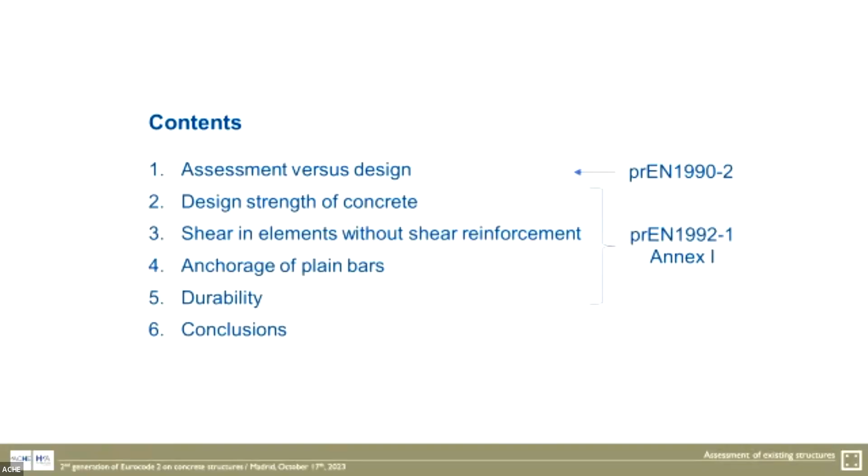One of the objectives of the new generation of Eurocodes has been to include provisions for the assessment of existing structures. In this presentation, we will start commenting very briefly some differences between assessment and design, and then we will comment some topics that could be conditioning factors in the assessment of concrete structures.

Regarding the first part, Eurocode 0 has been divided into two parts. Part one is like the current code we have, focused on design, but the second part gives some provisions for the assessment of existing structures.

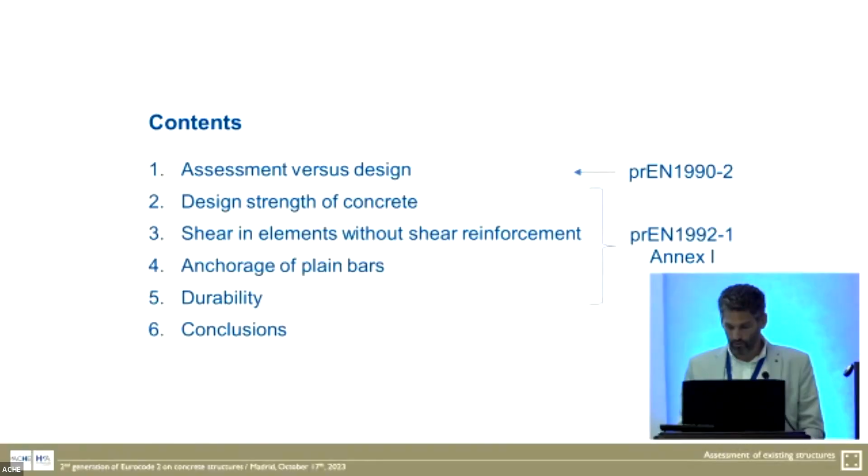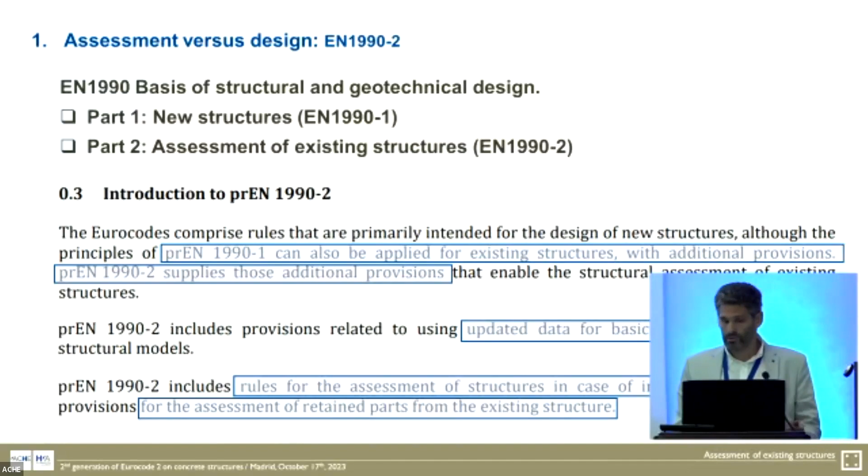Regarding the second part of the presentation, as Mr. Gant has already commented, Eurocode 2 has included an Annex I, with provisions for these topics. Starting with Eurocode 0, as indicated in the introduction of Part 2, Part 1 can also be applied for existing structures, but with additional provisions which are given in Part 2. These provisions are rules for the assessment of structures in case of intervention, and also for using updated data in the basic variables.

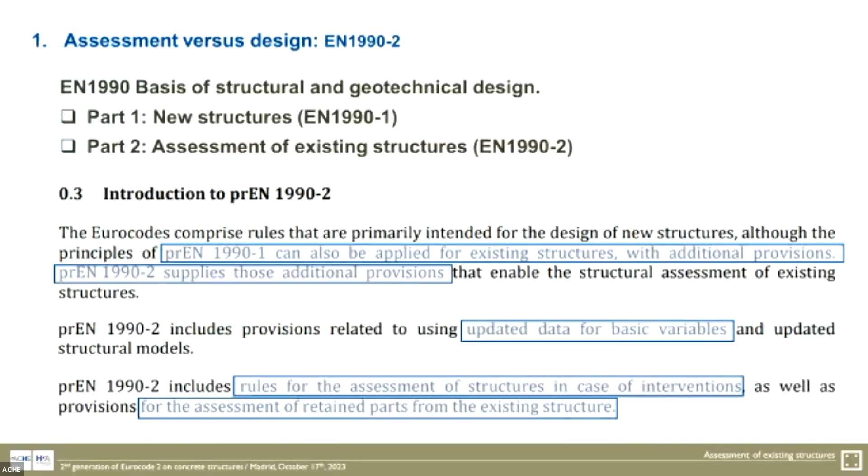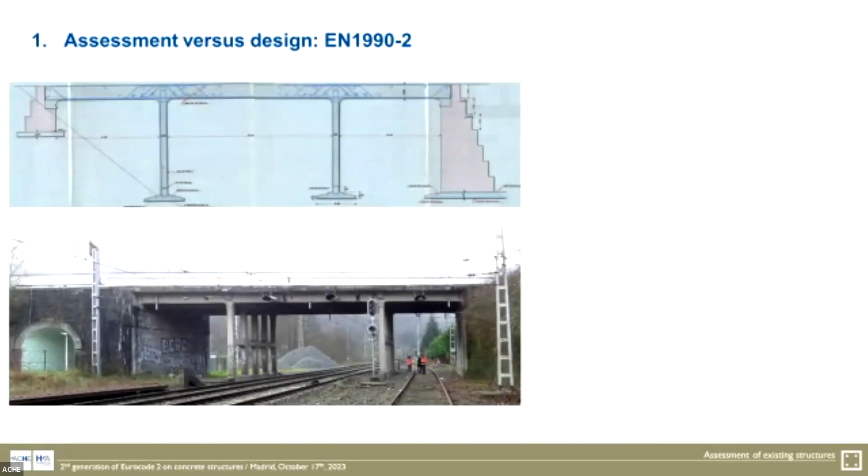In this example, we can check some differences between assessment and design. The slide shows a plan of a bridge, which was built in the 1930s, and a view of the bridge today. Of course, the regulatory criteria in design were different to those we have today, and many specifications about materials or details will not be met today. On the other hand, the bridge allows us to have information directly from the structure, and it reduces the uncertainties, and that will allow us to reduce the reliability index.

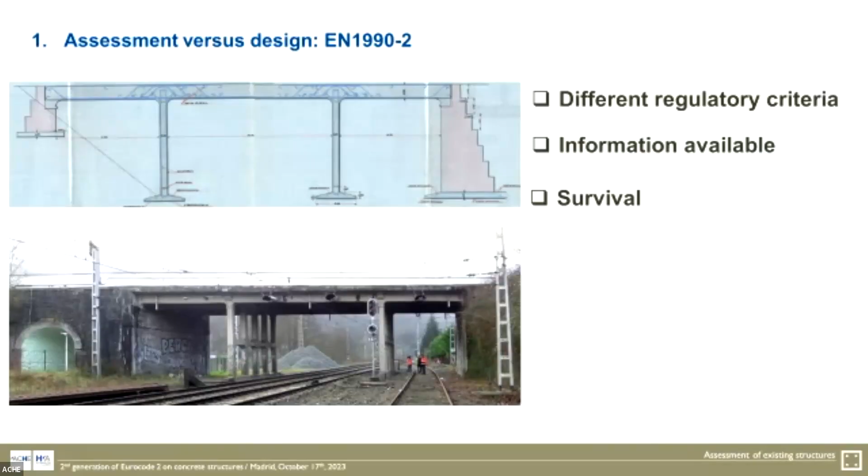In the same way, in cases like this, where the bridge has developed adequate behavior, survival, mainly when permanent loads are dominant, allows us to reduce the reliability to consider in the new service life. In the same way, in existing structures, the cost of measures to increase security is much higher than in design. So that is another reason why we could reduce the reliability index.

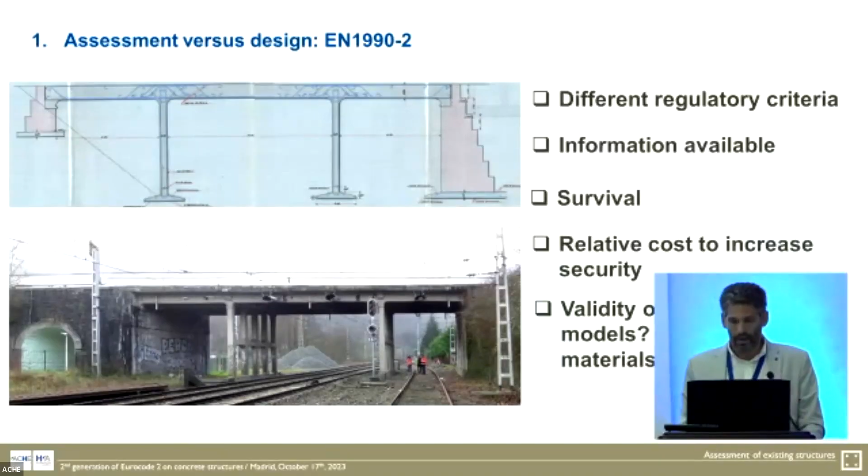In any case, we engineers must be sure of the validity of the physical models we use, as concepts such as utility or robustness were not as important as they are today. Because of all this, Part 2 of Eurocode 0 has included provisions for the investigation of the existing structure, but also some criteria to make the assessment.

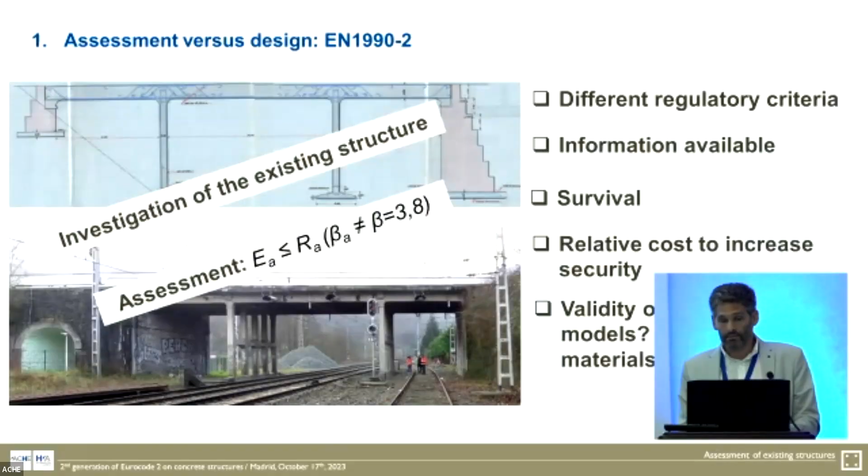And in the case we do it in a semi-probabilistic approach, as we do in design, it is proposed to do it with a different reliability index, different to 3.5, 3.8. This means that usually partial factors are lower than we use in design, but we must be careful, as we will check now.

Going into concrete existing structures, one of the main topics we need is to specify the concrete class. We do it by extracting cores from the structure. When we have the concrete class, we can define the design, or in this case, assessment concrete strength, by dividing the concrete class by a partial factor.

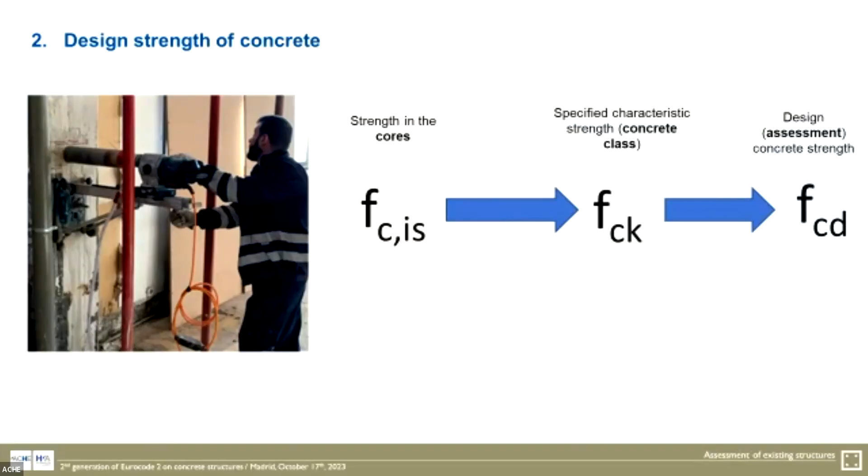For the first step, Annex I has included an important coefficient which takes into account the damage because of core extraction, the uncertainties of testing, and also the differences between concrete inside the core and concrete in the structure, as Jose Maria commented before. For the second step, as Jose Maria already commented, it is possible to update the partial factor, taking into account the new reliability index, but also the scattering and the size of the sample, of course.

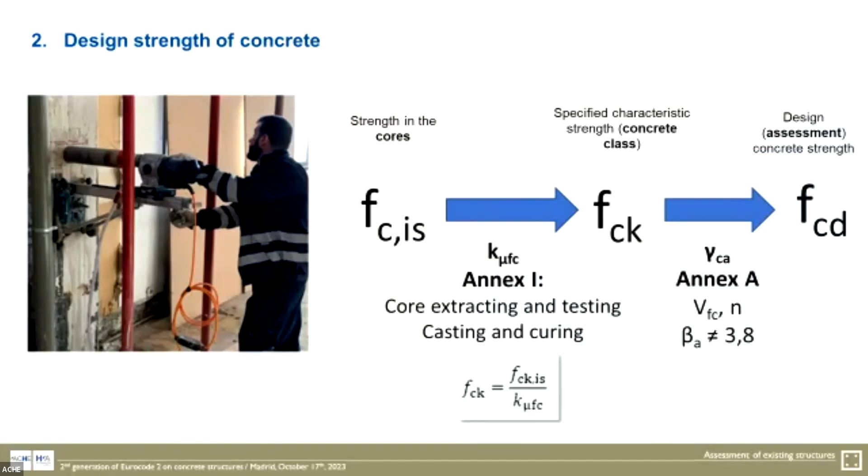This scattering is very important. In this graph is represented the coefficient of variation of concrete in different buildings and structures we have studied. And as you can check, in most cases, it is over 0.20.

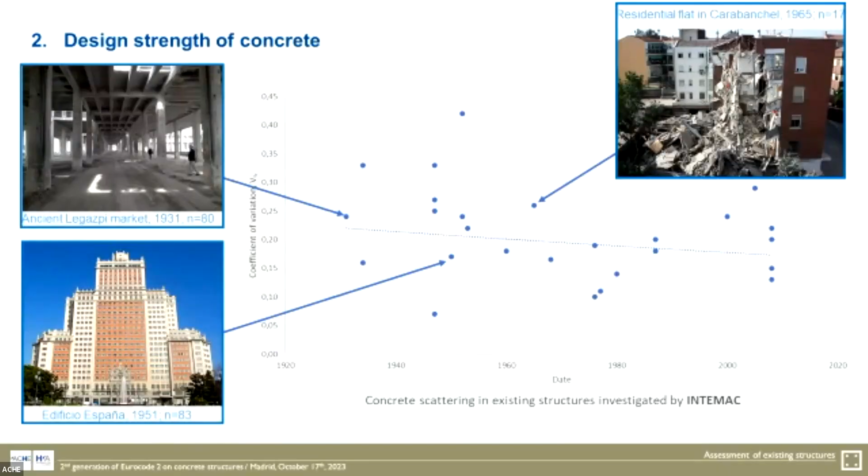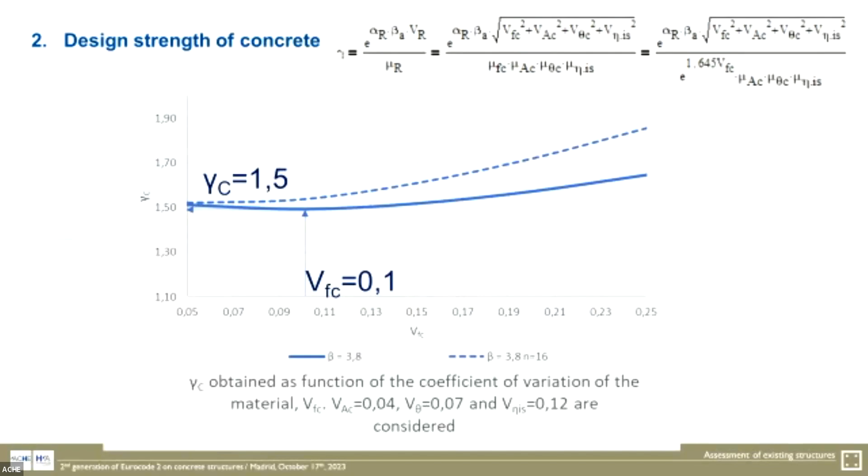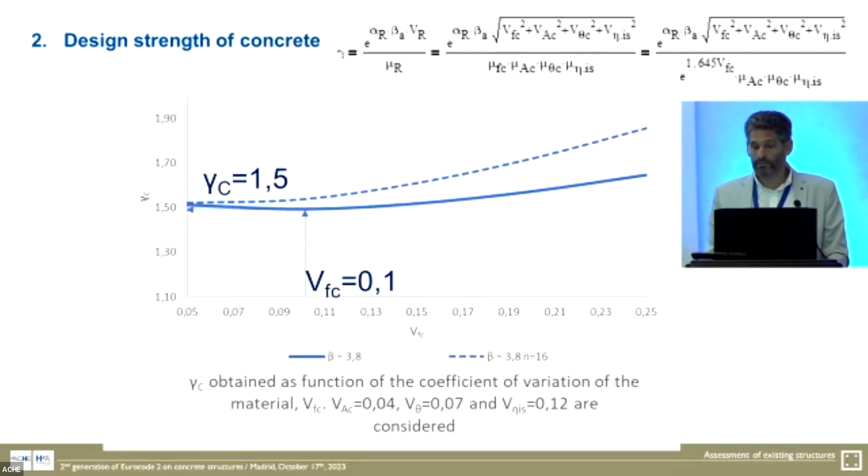Using the formulas that you can see in Annex A, you can easily obtain this graph, and you will check that the partial factor for a reliability index of 3.8 will be higher than the 1.5 we use in design because of that scattering in the sample. Of course, if the size of the sample is smaller, the differences will be higher. On the other hand, we can usually use a lower reliability index, and this means that the differences with design partial factors are lower.

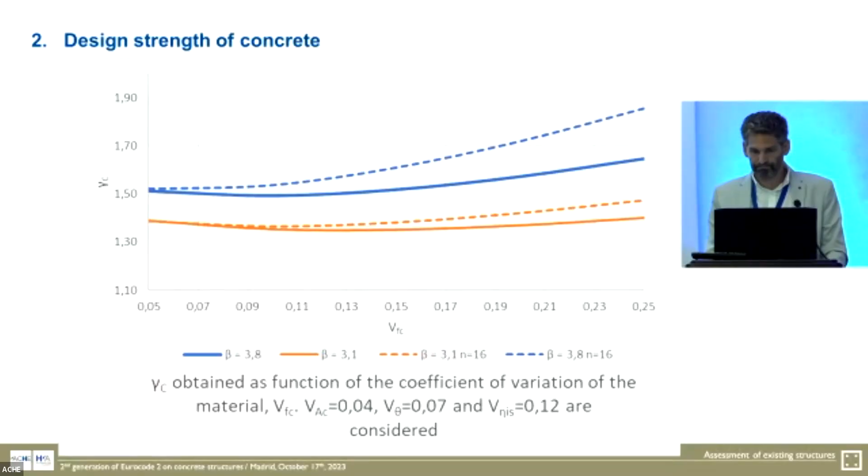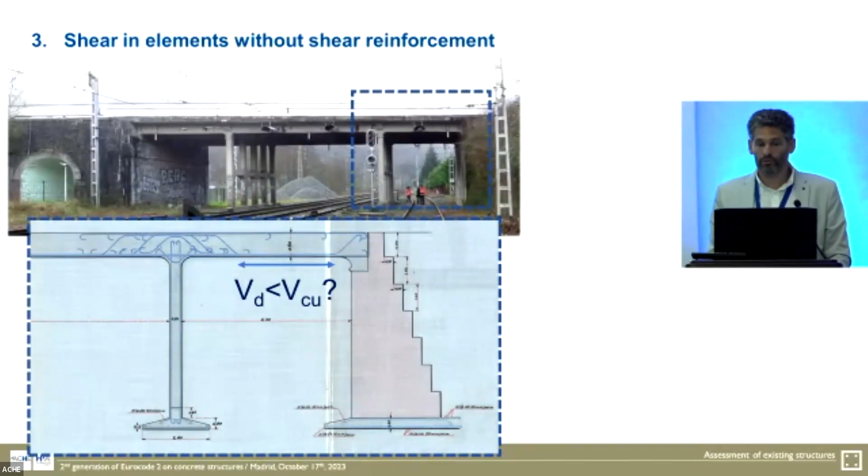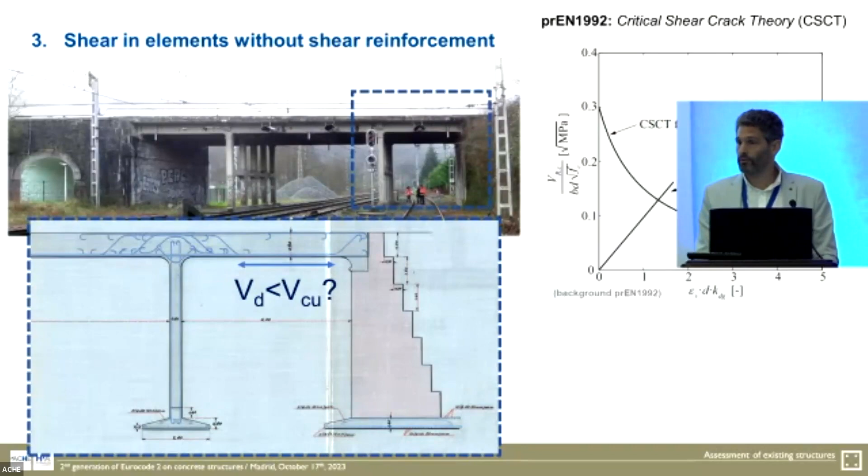Another key issue in the assessment of existing concrete structures is shear in elements without shear reinforcement. As will be explained later, Eurocode 2 has adopted the critical shear crack theory, and in the main text, they have made a small simplification to have a simpler formula. In the annex, the original formula is proposed, but in both cases, the important thing is that you can use the strain in the longitudinal reinforcement at the control section, epsilon v, and that allows you to optimize the shear capacity.

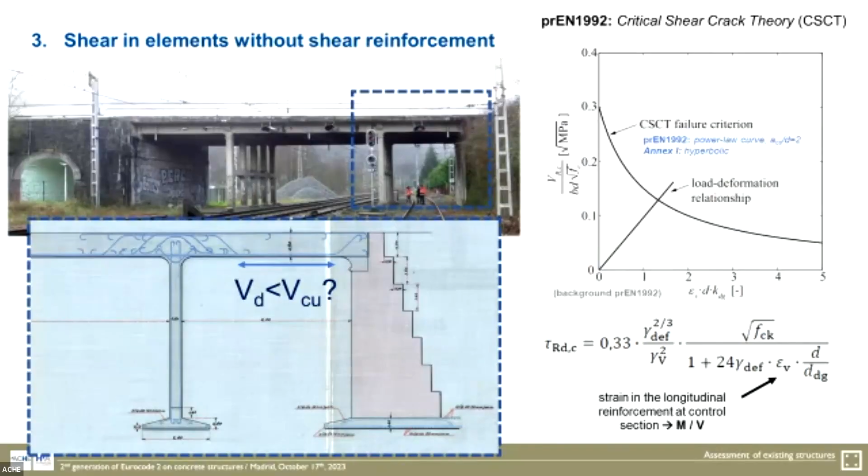It is explained in the paper of the monograph, but very briefly, in these graphs you can check in thin lines that the differences between the two formulas, Annex I and the main text, are not very high, but in both cases the shear capacity is quite a bit bigger than with the current code.

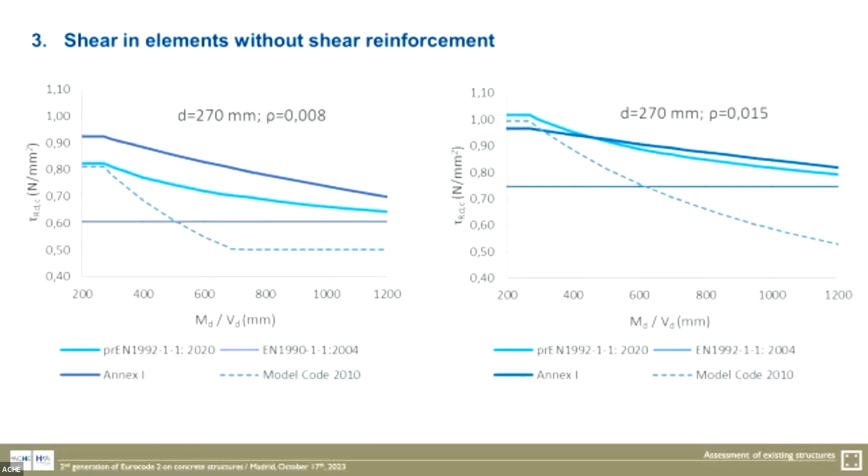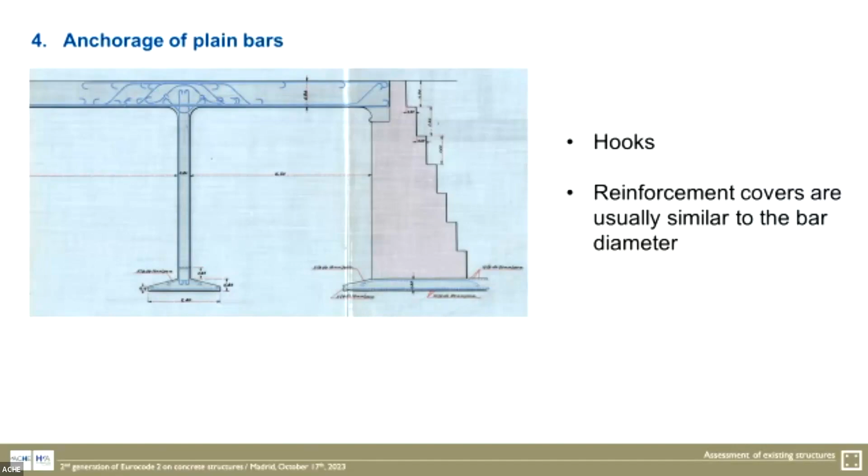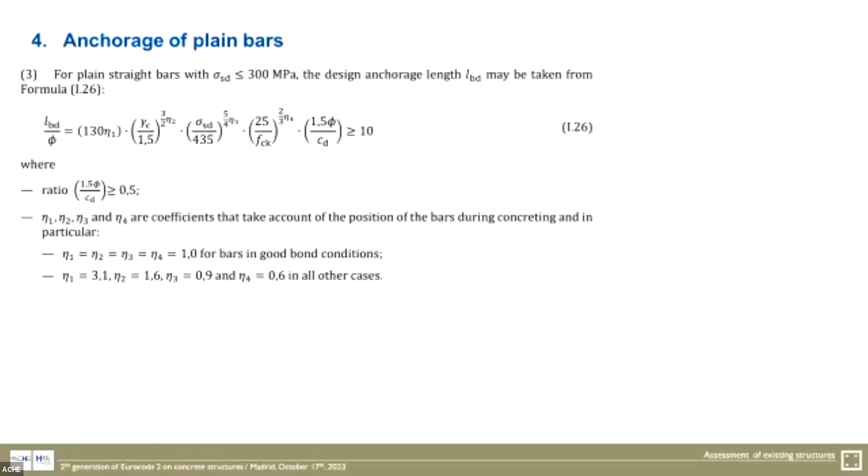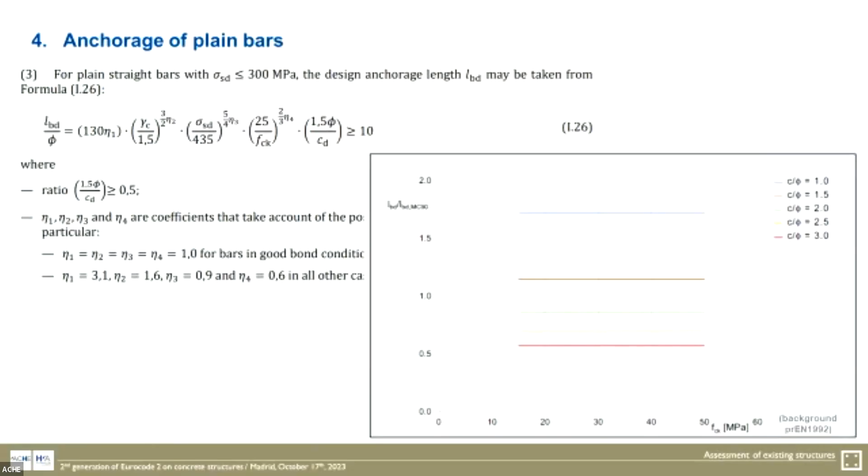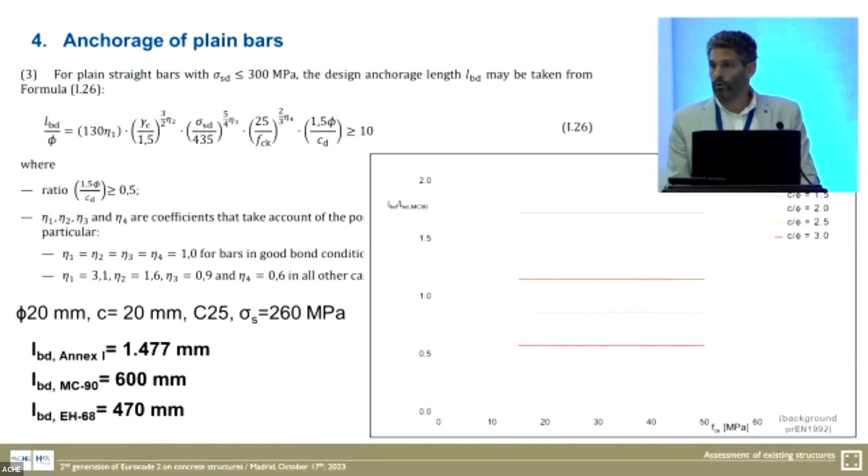If we compare the anchorage length obtained with this formula and the anchorage length obtained with the old Model Code 90, because the last Model Code doesn't include provisions for plain bars, for example, in a very common situation of a bar of 20 millimeters diameter, and with these conditions, the resulting length is more than double that of Model Code 90. If we use ancient codes of Spain, differences are even higher.

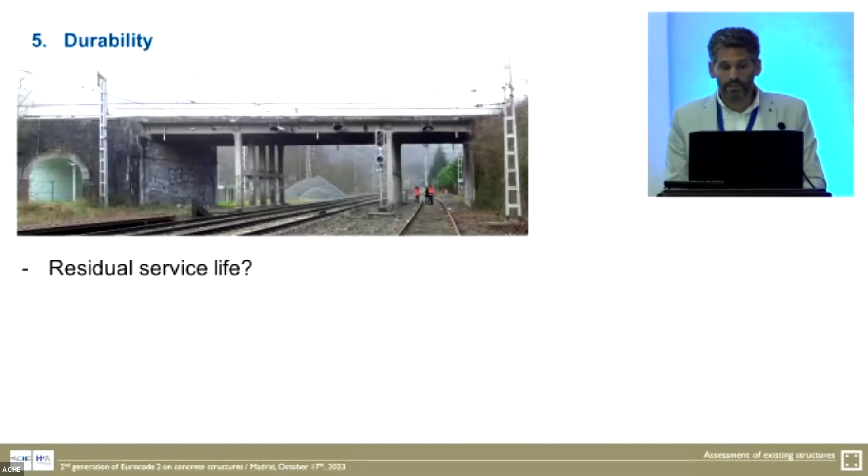Finally, I cannot finish without mentioning durability. Mari Carmen has already said something, but one of the key questions in the assessment of an existing structure is to answer what the residual service life is. Regarding this point, Eurocode 2 has no predictive methods. And as a difference with ultimate limit states, a consensus with the owner or with each party intervening in the project must be required.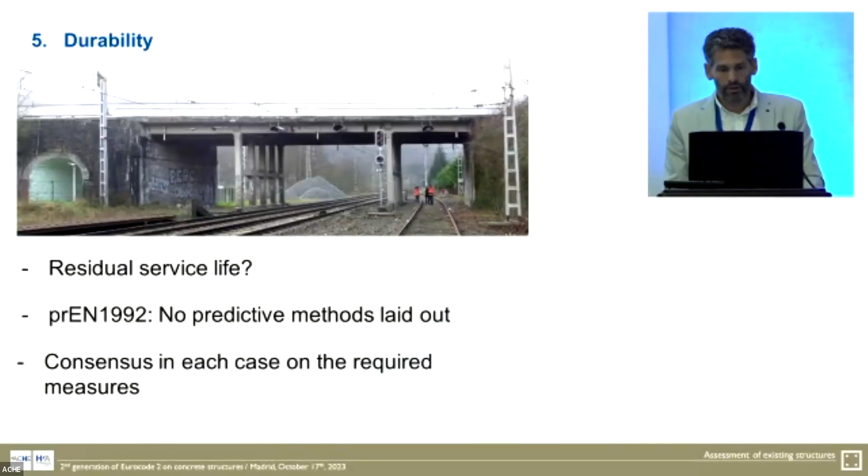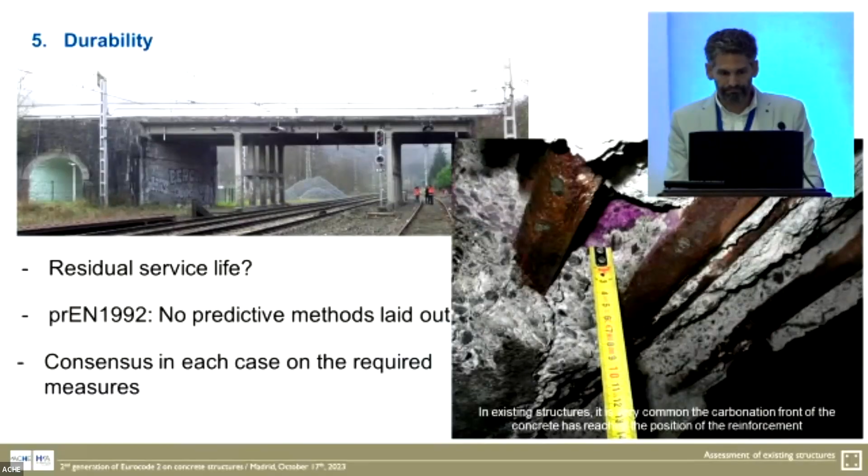For example, in a very common situation where the carbonation front of the concrete has reached the position of the reinforcement, in some cases it is necessary to paint the whole structure, even to repair many of the surfaces. But in other cases, it can be left without doing anything if the speed of corrosion is low enough. Annex I also includes some provisions for the calculation in ultimate limit states of deteriorated structures, both for the concrete cross-section and for the reinforcement.

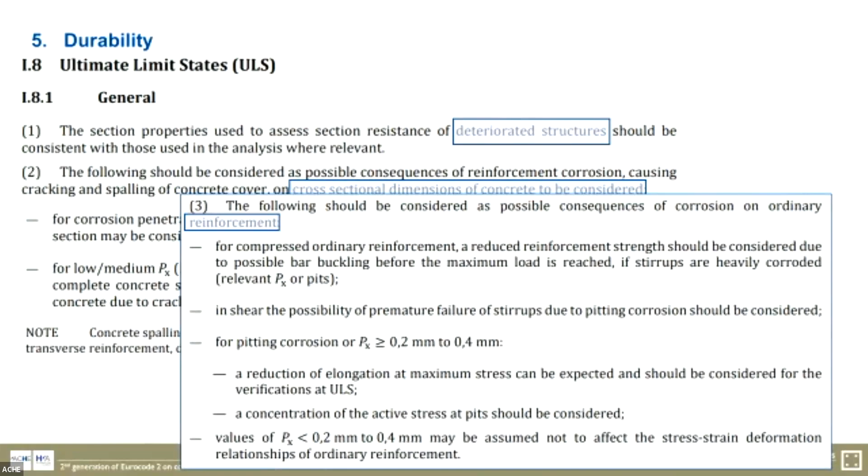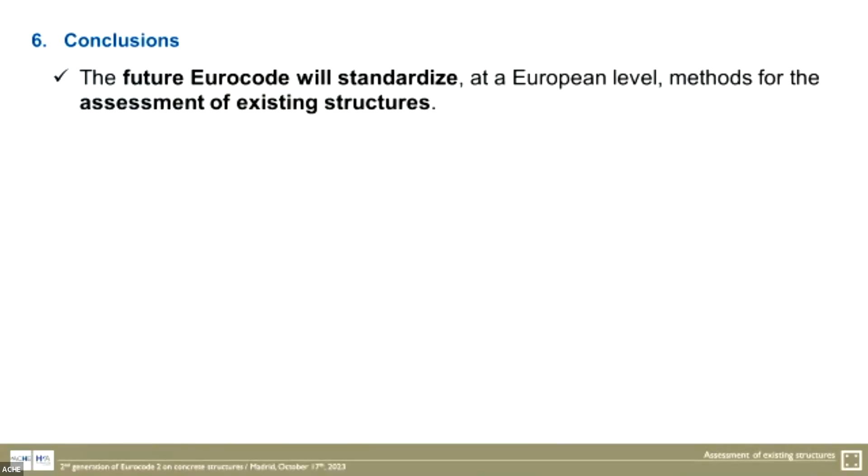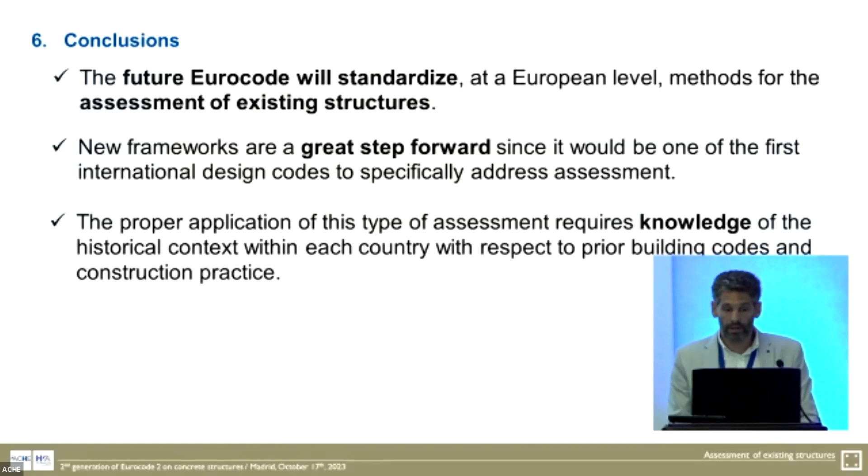And finally, some conclusions. First, the future Eurocode will standardize at a European level methods for the assessment of existing structures. These new frameworks are a great step forward, since it will be one of the first international design codes to specifically address assessment. However, the proper application of this type of assessment requires knowledge of the historical context within each country with respect to prior building codes and construction practice.

And finally, there is still a long way to go, including aspects such as the treatment of deteriorated or damaged structures, the definition of predictive methods for estimation of degradation processes, the consideration of the level of knowledge in the assessment, etc., that need to be further analyzed for the practical implementation.